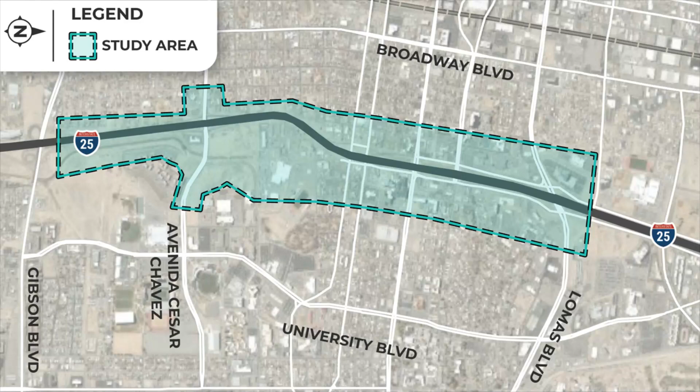In cooperation with the Federal Highway Administration, FHWA, we're conducting an environmental study to explore a transportation solution that improves safety and mobility. What you see on the map for the study area is wider than the actual footprint of any potential project. This is intentional so that the team looks at potential environmental effects of transportation improvements.

We have shared a flyer summarizing what we heard from the public. I'm going to take a couple of minutes before we get into new information to cover your input because it's very important to the study team to consider. Thank you for your valuable input.

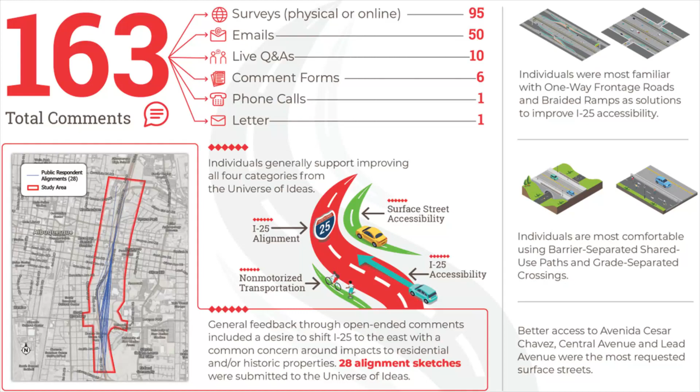The study team received 163 total comments. That's a great turnout. Not only that, but the people took time to fill out our full survey, which had a lot of questions for you to weigh in on. And those specific questions helped the study team in the early stages to understand your perspectives. Additionally, 50 emails were received, and we took comments in our Q&A, mailed in forms, calls, and a letter was received.

We focused the first public meeting on 4 categories we called the universe of ideas: I-25 alignment, I-25 accessibility, surface street accessibility, and non-motorized transportation. Overall, there was public support to improve each of these categories.

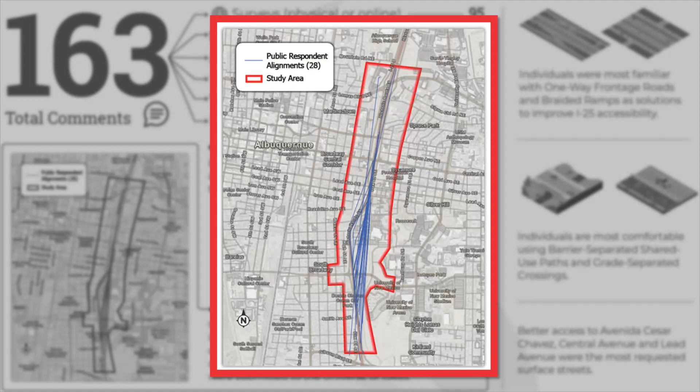We had an exercise in our survey packet and online for people to draw in where they would like the alignment to shift to. Based on our conversations at the public meeting, we are not surprised to see community in support of shifting I-25 to the east. We're going to talk more later about all the options that we've looked at, but we wanted to share the map with you all.

Lastly, in the other categories, people are most familiar with one-way frontage roads, braided ramps as potential solutions to improve I-25 accessibility. Individuals are more comfortable using barrier-separated pedestrian and bicycle facilities, and that's consistent to what we're also hearing on other projects. There is public support for better access to Avenida Cesar Chavez, Central Avenue, and Lead Avenue.

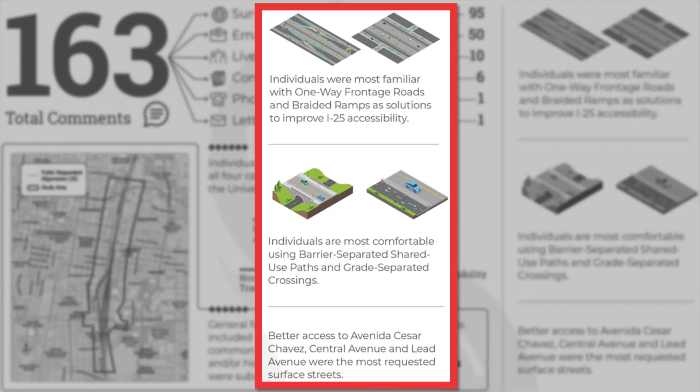To see this flyer or read our full detailed report of the first public comment period, you can find them on our study website. Next, Nicole is going to speak to adjustments the study team has made based on public input. Thanks, Summer. So one of the main reasons for the first public outreach effort in the fall was to receive input from you on the transportation needs that you see in your community.

And then we use that information to refine what we call the purpose and need, or the reason for the improvements. So based on the feedback we received, we adjusted our purpose statement to include the importance of improving travel time reliability in the area, both on I-25 itself and then in surface streets crossing I-25. So the full purpose statement now reads, to improve safety, improve travel time reliability, prepare for future travel demand, and replace aging infrastructure on I-25 between mileposts 223 and 225, and to accommodate non-motorized transportation across the I-25 corridor.

On this slide, you can see the transportation needs that support this purpose statement, including a need for roadway geometry improvements that will accommodate the appropriate design speed, a need to reduce crashes within the S-curve area, and a need to provide a safer driver experience by reducing driver workload around the S-curve. In this area, drivers need to merge, weave, stay in their lanes, and navigate all at the same time, so reducing this driver workload will produce a safer driving experience.

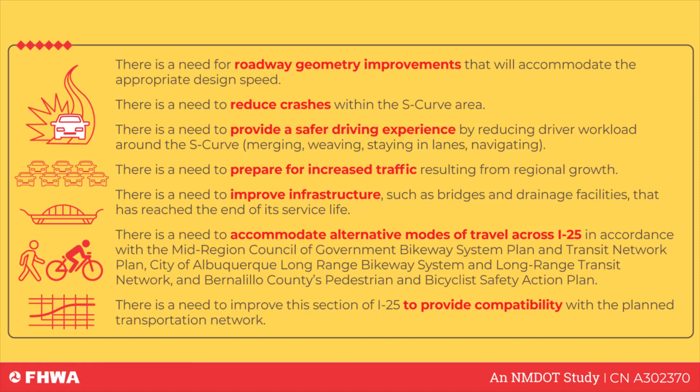So next, Alonzo is going to provide an update on the non-motorized transportation elements.

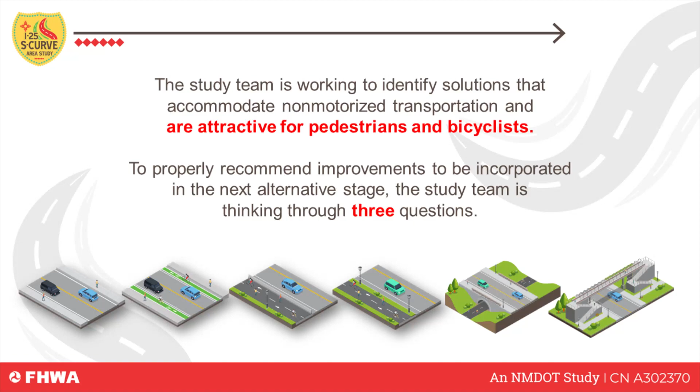Thank you, Nicole. We are working to consider non-motorized transportation improvements in future combined alternatives. We want to identify solutions that accommodate facilities and are inviting to users. As we continue to review ideas, we are thinking through three questions.

Question number one: how do potential walking and biking improvements tie into existing or planned facilities? Within the study area, there are six streets that cross I-25, each with their own characteristics, making a one-size-fits-all approach impossible. What may work at Martin Luther King Jr. Boulevard under I-25 may not work at Central Avenue. Our team meets regularly with the city of Albuquerque and has met with advocacy groups, but we want to hear from you too.

Question number two: where are the hotspots for crashes involving pedestrians and cyclists? Due to the high pedestrian fatality rates in the region, it is important that we work on bringing the data, stakeholders, and approaches together to enhance safety. The crash hotspots shown in these graphics are from our partners at the Mid-Region Council of Governments, also known as MRCOG. You can see from these maps, for both pedestrians and cyclists, the biggest hotspots are at Dr. Martin Luther King Jr. Boulevard and Lead Avenue.

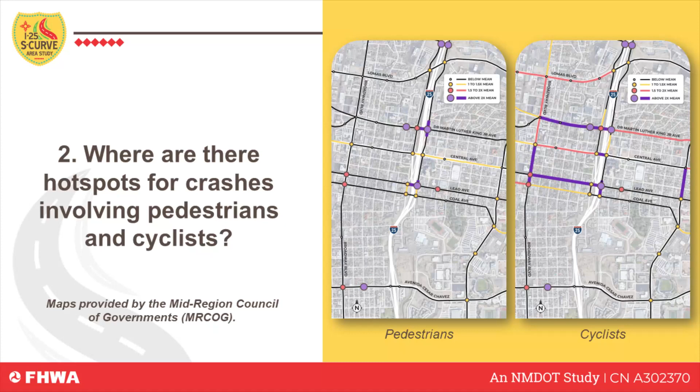In your survey packets, let us know what your experience has been along these corridors. And question number three: what facilities get the most pedestrian activity? We use a tool called the Pedestrian Composite Index, compiled by MRCOG, that shows where pedestrian activity is expected to be the greatest based on existing attractions.

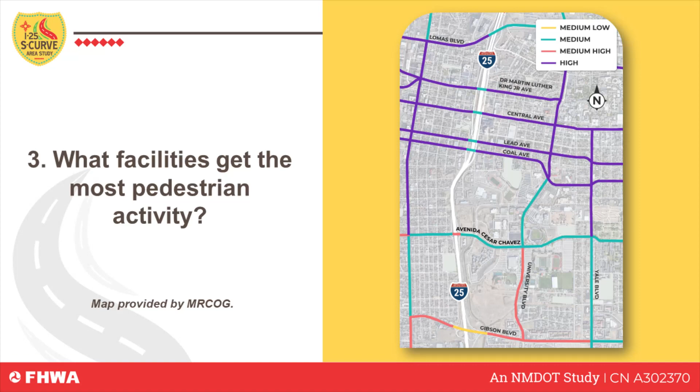You can see on the screen, most of the cross streets in the study area are showing high activity. This is shown by the color purple. Improving walkability and safety in these locations should be prioritized if suitable facilities do not already exist.

We will continue to work with other area stakeholders to expand the improvements that move forward after this study, to provide critical links, since the study area and subsequent project footprint will be limited. We recognize destinations such as schools, bus stops, and grocery stores are a draw for non-motorized transportation activity. Again, let us know in your survey packets what facilities you are using the most.

Nicole is now going to review the alternative development process and explain what comes next for non-motorized transportation after the public comment period. Thanks, Alonzo.

So this graphic is an overview of the alternatives development and screening process. It shows where we're currently at in the process and then how we plan to identify a preferred alternative. So we're currently at this stage for today's public meeting.

We've taken our universe of ideas that we presented at our last public meeting and divided it up into three buckets: I-25 alignment, interstate interchange, and non-motorized transportation. We've identified 9 I-25 build alignment options and 6 interstate interchange options, and these have gone through an initial screening based on the purpose and need we discussed earlier. We've narrowed these down to 3 alignment options and 3 interstate interchange options, and Mike is going to discuss in detail each of those options later in the presentation.

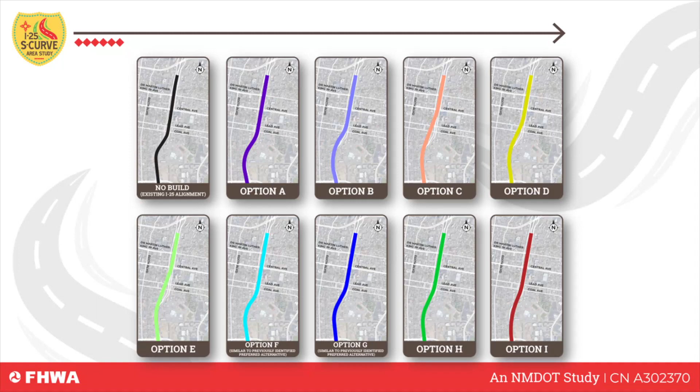We identified and developed 9 different alignment options in addition to the no-build, so there are a total of 10 in consideration tonight. We've evaluated and narrowed those down. This isn't necessarily the easiest place to look at them on the screen behind me — they're all on different boards out in the hall, and it's a lot easier to see the nuances between them as you mingle around. We'll be around for quite some time after the presentation for questions and to look at those with you.

At this point in the study, as Nicole mentioned, we have not yet analyzed the detail with regard to the environmental resources or community aspects that we need to fully consider all the way through. This represents a higher level analysis at this point. This level 1 screening basically addresses how well these different options address the purpose and need we've defined. So we weighed these options against what we're referring to as measures of effectiveness — elements of that purpose and need that Nicole described. In this evaluation, we considered 3 measures of effectiveness.

Number 1, how well these options improve geometry and reduce overall driver workload by straightening the S-curve. For those at the last public meeting back in November, we talked a lot about driver workload and how many things are going on for motorists driving through the interstate area. They're dealing with a curvilinear alignment, as well as a lot of on-ramp and off-ramp merging and weaving, and needing to be in the right lane when they reach the I-40 interchange. There's a lot on the driver's mind, and that overall workload plays into how safe or unsafe a facility is — we feel that's a key factor here.

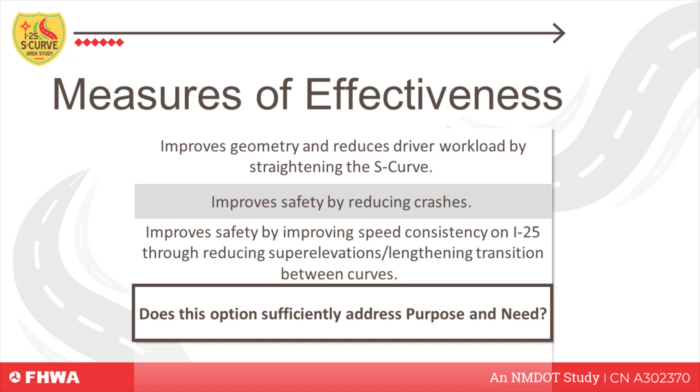We gave a qualitative ranking of each of these based on the information we analyzed, and hopefully this is somewhat self-intuitive, but green essentially good, red not so good or bad, and probably not much more to explain with that. So you'll see these symbols in different matrices attached to these different options, both here and then out on the boards out in Station 2.

This is the analysis with regard to the no-build option. And as we looked at the no-build option, it did not fare as well as we would like and didn't feel like it addressed the purpose and need sufficiently. So hopefully that's apparent, for otherwise why would we all be doing this tonight? But we'll move the no-build option forward regardless.

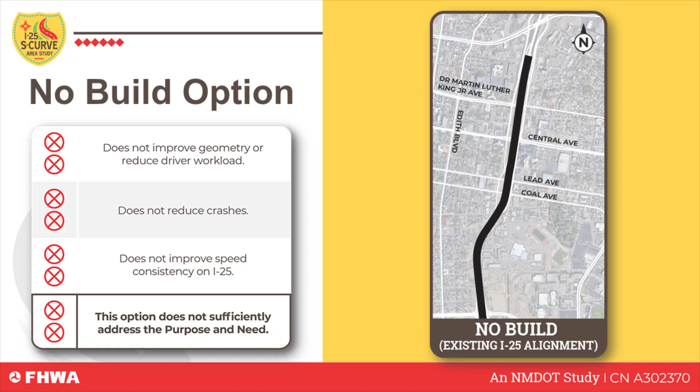Then option A, and again, as we walk through these 9 build options, they kind of start from a westerly shift. There being 2 curves, the westerly shift more or less shifts the northern curve in most cases to the west and straightens that out to an extent. But there's different configurations of different radii of the different curves, and then separation varies between the curves. If you can envision that the nature of the alignment is not just how tight the curves are, but the spacing of the curves, because you're transitioning from one curve to the next. So the tighter the transition, the more difficult that is to negotiate. So as we compare and contrast these things, that's what these evaluations are measuring.

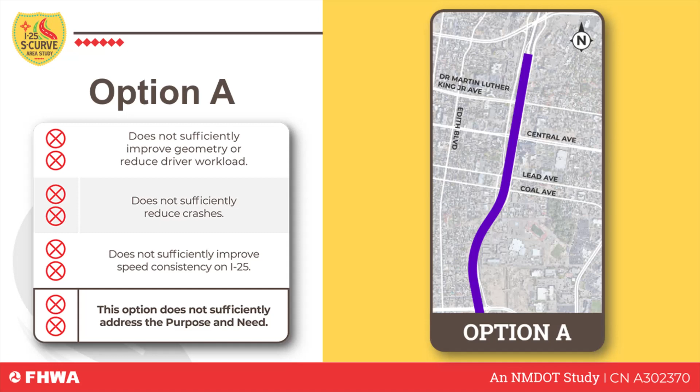So option A has a shift somewhat to the west, pretty curvilinear alignment. Option B straightens that out a little bit more along the northern curve. And again, I think it's easier to probably look at these in detail out on the boards. But it also improves some of those measures of effectiveness somewhat.

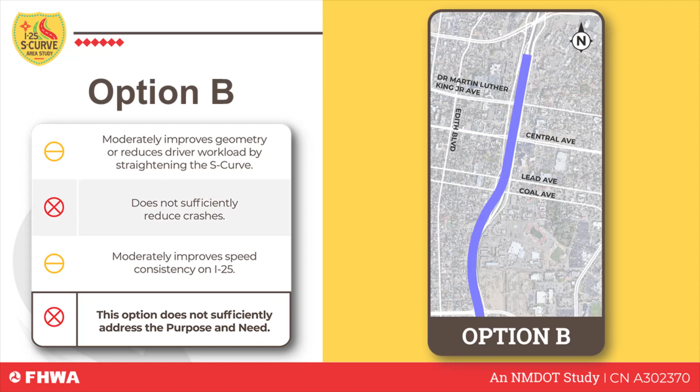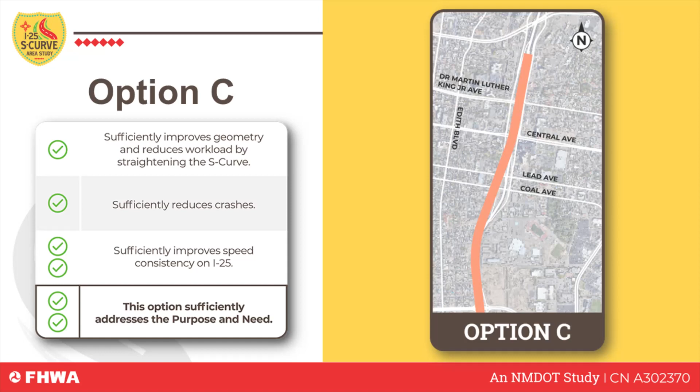Option C really straightens it out, and it actually moves the alignment quite a ways to the west, adjacent to the lead and coal area, and really straightens that out and pushes the northern curve further to the north and flattens it quite a lot. This performs quite well in all of the analysis and addresses those purpose and need measures of effectiveness quite well. So that shows up in the symbology here.

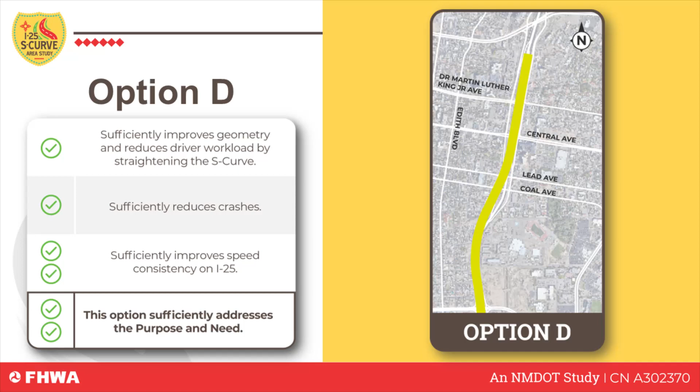Option D, less of a shift to the west, but also straightens the alignment and separates the curves enough such that it does improve upon those measures of effectiveness quite well. Option E, a little bit less so. Again, each alignment is slightly nuanced, but they're moving a little bit more towards the center of where things are at.

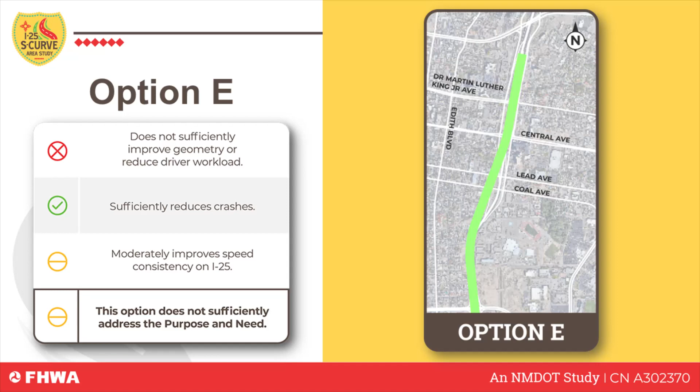And then there are two options, F and G here, that are very, very similar, that fall very close to the alignment. And you can see it most. As you look at these, each of these kind of have an envelope that shows a width. There is some background in that. I believe we estimated a 240-foot width, and that would contain a lot of improvements for what we're thinking are necessary down the line. But there's nothing that represents a final design here. But they basically envelope that present. But these lay over top of the existing alignment more down the middle of the road. Euphemism maybe, that may not apply very well.

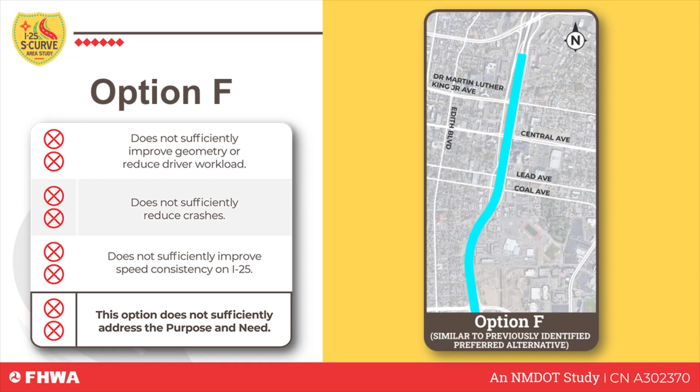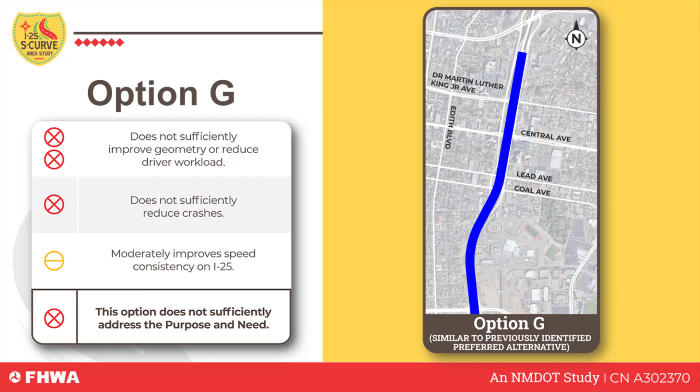But for those of you that remember, there was a study completed in 2016 that had a preferred alternative that came out of that. These two alignments, F and G, very closely match what was recommended out of that study. So the department, in hindsight of the last few years and the experience they've gained, felt like these did not flatten those curves and straighten that alignment sufficiently to improve the safety enough and reduce crashes enough. So these did not do as well with regard to each of those measures of effectiveness as some of the others.

Then as we move on to option H, this is shifting more to the east, and most of that shift occurs in the southern part of the study area adjacent to that southern curve.

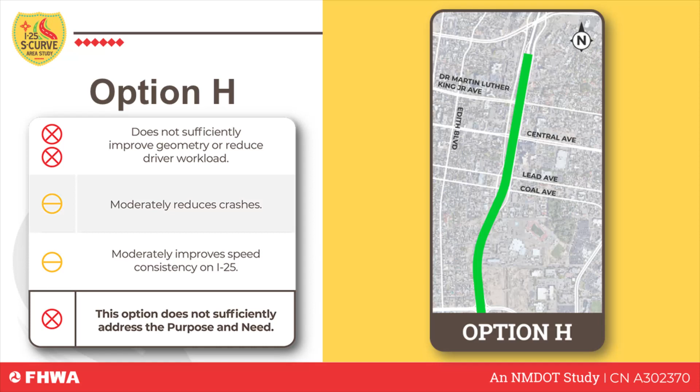This didn't quite address the measures of effectiveness as well. Our final option is another pretty straight alignment with more straightening of the curve to the south. It separates the curves quite a bit and improves really all of those measures of effectiveness quite well.

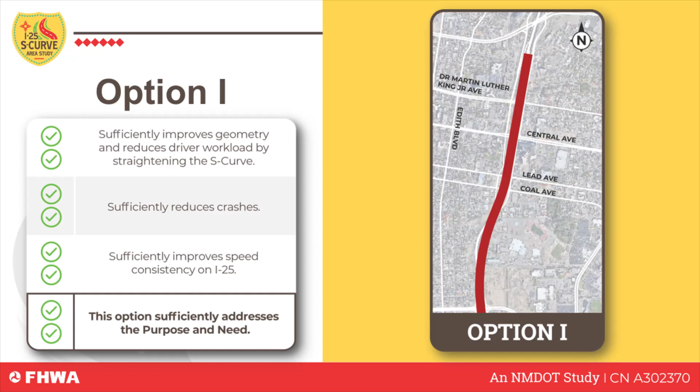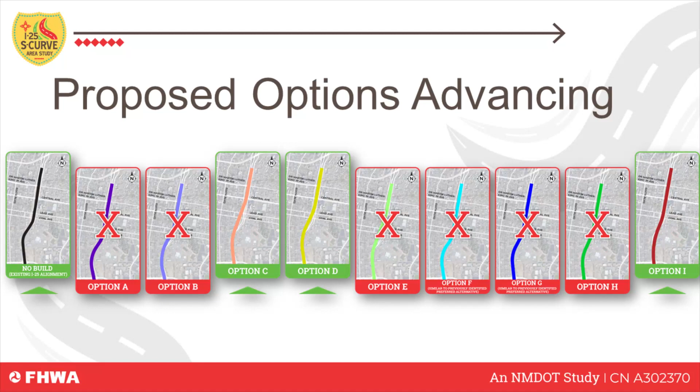As a result, on the next slide we show them in total. We're proposing as a study team to forward three build alternatives, along with the no build option, with regard to alignment, and move those forward to the next stage of the study. So those being options C, D, and I.

Probably an obvious question is, what are the impacts of these? As Nicole mentioned, the next stage of this study will move into a more detailed stage of identifying specifically the resources that exist and the nature of those, and what the impacts are.

That being said, most of the resources we have to do with are neighborhoods, specific populations, cultural resources, and in this case that usually translates to historic properties or properties with historic buildings. At this level of study, we looked at properties with buildings 50 years and older. The next stage will look in more detail into the history of each property we potentially affect, and understand how substantial that is with regard to the historic context they fall in, analyzing those in much more detail.

But we were able to take a higher level look, and amongst those options we propose to forward, option C has more impact to those types of resources, particularly potentially historic properties. Option D has pretty high level of impacts as well, not quite as much as C. Option I has, at least with regard to the three, the least of it.

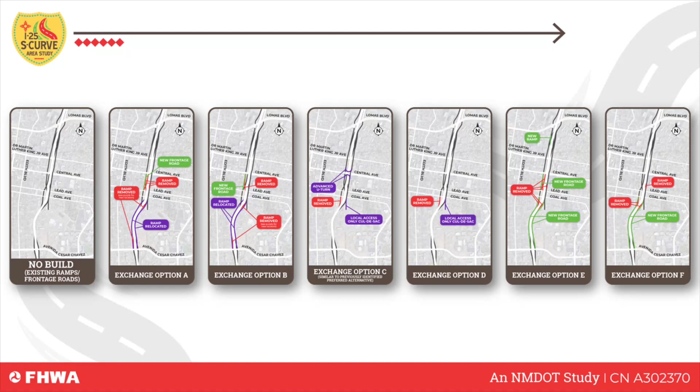We evaluated these against a set of measures of effectiveness, again going back to that purpose and need. Number one is how well the different options improve geometry, reducing driver workload, updating the interchange spacing, ramp spacing, and ramp length to meet current design standards.

We also looked at how well it improves safety and reduces driver workload along I-25 by reducing the number and consolidating the ramps and simplifying them.

We considered how well that relates to the frontage road system that is in place today and how well it may reduce potential decision or conflict points along those frontage roads, and then how well or to what extent it limits out-of-direction travel or changes patterns of what people expect today.

Then we have a number of critical services, key destinations, key employers in the area, the central business district. We also considered how well these different options maintain those traffic patterns and maintain accessibility to all of those features, all of those key locations and destinations.

And then the last thing being, how well the option replaces existing or aging infrastructure. Last time we talked a lot about the age of the infrastructure, much of which was built in 1961, same age as me—we're getting old, so we need replacement. But that's what that last measure of effectiveness plays to.

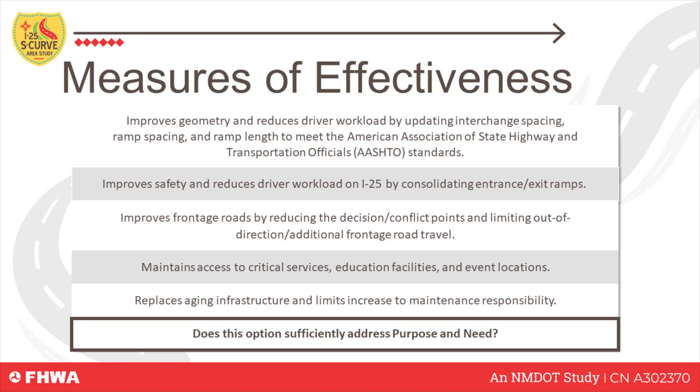Our scoring is a little more simple with regard to this. We had just a three-level scoring, again green good, red bad. We evaluated the no build, and as you might imagine, since it has pretty congested ramp spacing and operational issues—we heard a lot of people talk about the weaving and merging that's complicated with some of those ramps—this doesn't address those well, holding things according to the no build. So we basically determined this doesn't sufficiently address the purpose and need.

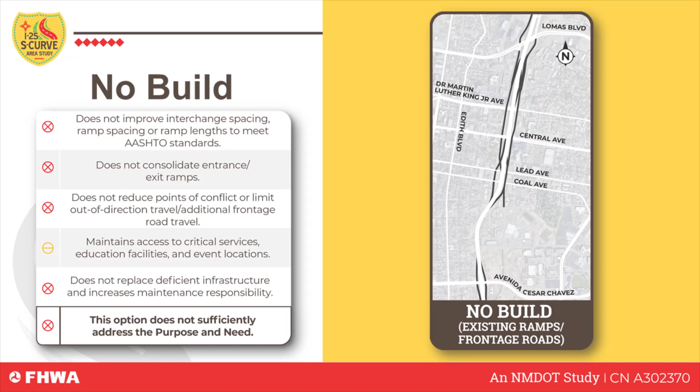Options A and B are very similar. The major features are that the ramps on the north end of Cesar Chavez and the ramps south of Coal, whether on or off ramps, were extended and lengthened, and we're proposing to introduce a braided ramp between those two so the traffic isn't weaving. It also includes removal of the on-ramp northbound north of Lead.

Option B is very, very similar. The only difference between option A and B is that option B leaves in the off-ramp southbound to Lead.

The next two options contemplate what was brought up in the 2016 study. This option C was the configuration proposed as the preferred alternative.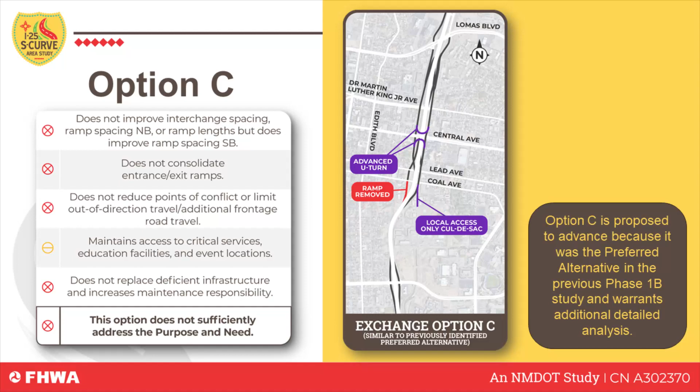The highlighting feature of this is that it includes closure of the on-ramp south of Coal to southbound I-25. For people in the Lead and Coal area who wish to go southbound on I-25, they would need to go north on the northbound frontage road to Central, then loop around on a new advanced U-turn. Most people in this part of the country call them Texas turnarounds, but we're not in Texas, so we call them advanced U-turns. You would go north to loop around at Central to go back south and get on the on-ramp from Central to southbound I-25 if you wanted.

Options E and F are quite progressive, quite a bit different. It'll take a little bit to describe.